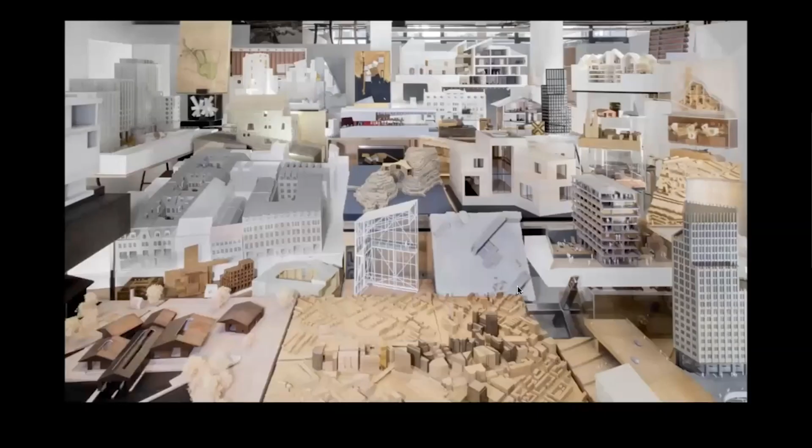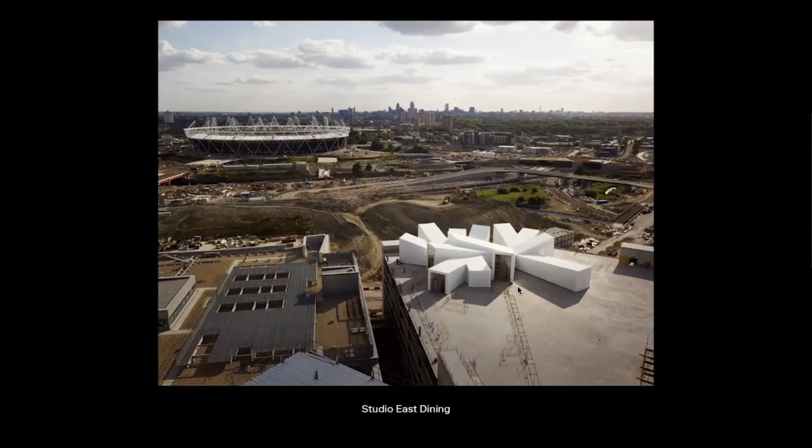Here's us. This is Carmody Groarke. Our studio's in Farringdon in London. Here's our studio full of all of our projects. Some of the early projects make a virtue out of the necessity of scarcity. Sometimes that's an economic scarcity, and sometimes it's quite literally the idea of a short-lived and quick-build project.

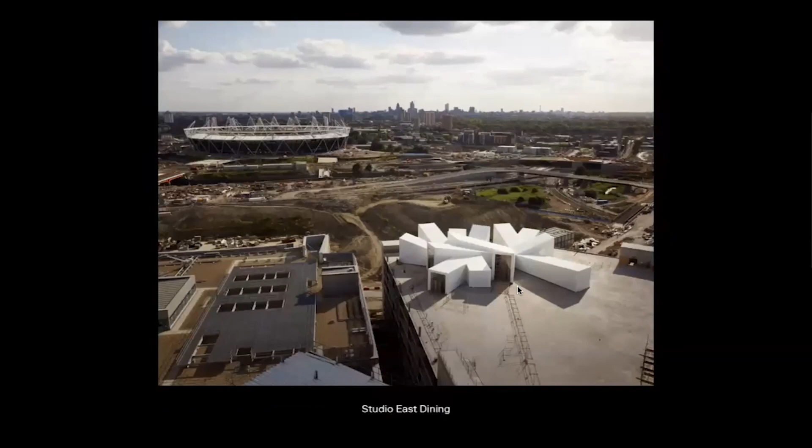As you can see here, this is Studio East Dining, which we did in 2010. This was a project that celebrated the emergence of the Olympic Games masterplan site in Stratford, and the project was essentially a hospitality pavilion made entirely out of materials borrowed from the construction site surrounding it. And what you see here is this cathedral-like quality space made of scaffolding, scaffolding boards and builder's lamps.

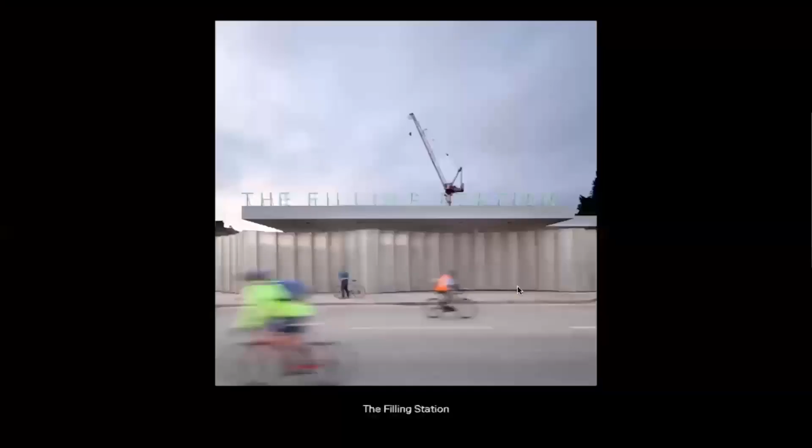And I think that these projects gain their sense of character often from the materials available and often through thrifty, economical means, and are very direct in the way that they communicate how they were made.

This is the Filling Station. So from three weeks, this project was intended to last for 3 years. And this took an existing petrol station right next to the emerging construction site of King's Cross behind. And you can just see Central St Martin's just emerging in the background.

And this was essentially a space that created a cultural venue with a restaurant and bar that overlooked the now opened up terrace of the Regent's Canal, and literally used the infrastructure of the petrol station to gain its sense of character. It was enveloped entirely in this glass reinforced plastic screen, which essentially protected people within. And then we literally used the shop of the petrol station as a restaurant, which became a fine dining restaurant.

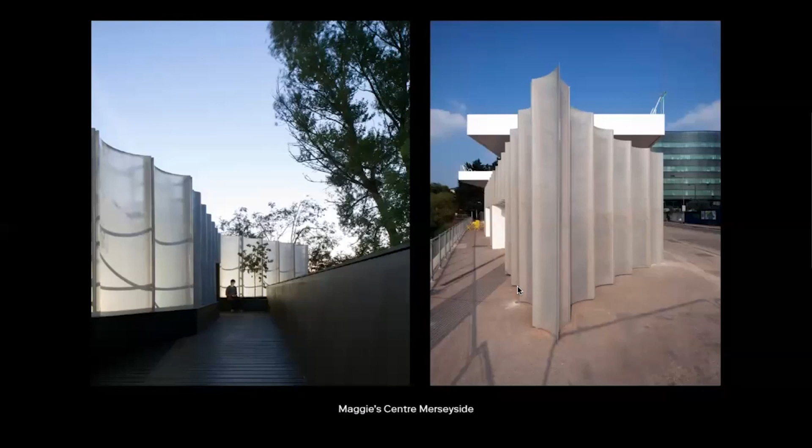And I think what really characterises our work is that we're also not afraid to reference ourselves. So we use the same component of that project in the Maggie's Centre for economical purposes, but it felt like a very appropriate way to make a new piece of architecture developed from something else.

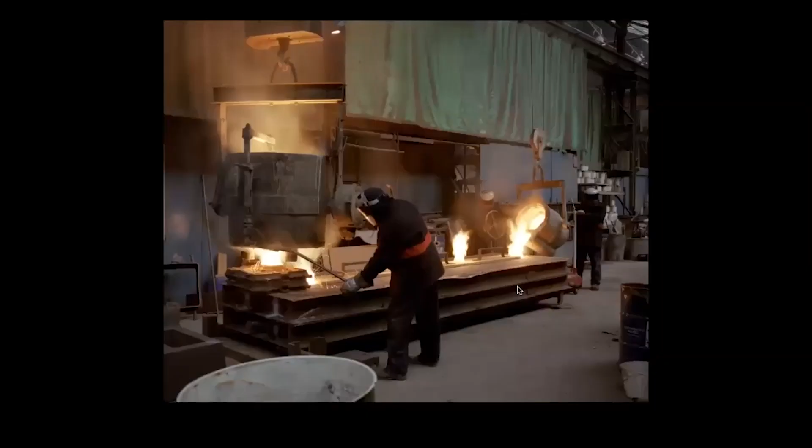And shifting the time frame entirely to 300 years, this just shows a completely different challenge. This was a memorial to the 7th of July bombings, which is in Hyde Park just by us. This project had the idea of making a memorial out of the singular and collective loss of 4 different events and 52 innocent people that died. Each stelae is essentially cast of molten stainless steel in just 20 seconds and has an incredibly tactile surface quality to it that stands in the park.

And I think that all of these projects come from an entirely open approach to collaborating. Our studio has, I think, as this school also does, the ethos of taking in a diverse range of influences of artistic practice, of makers, and a completely diverse creative discipline. And what I hope from the projects that I'll show you is that these projects kind of embody an approach that attempts to make the most out of the least.

And I'm going to focus on 3 projects that I think really capture the idea of retain, reuse and reinvent. I'm just going to show you very quickly. Some of you, I think, have already been here, which is really useful. So this is the Hill House box that is essentially a protective shroud around this magnificent house by Charles Rennie Mackintosh. Now this house is disintegrating because it's in Scotland and subject to lots of strong weather.

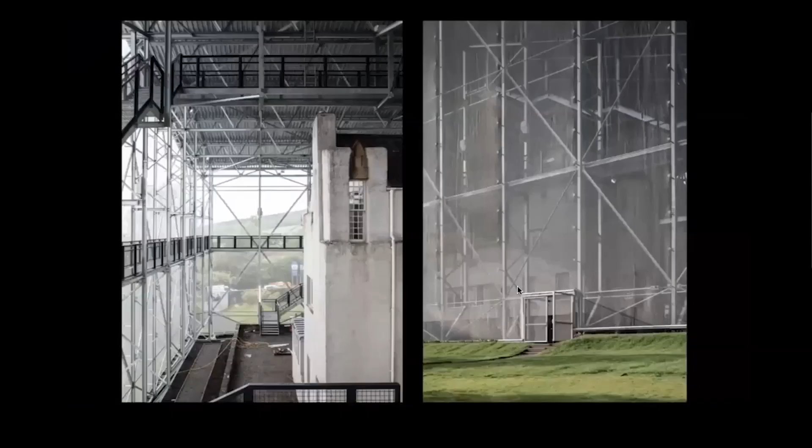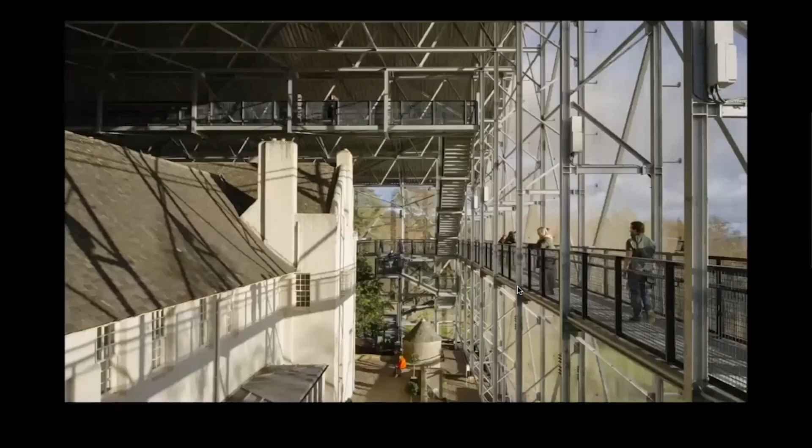This project essentially creates a temporary shelter, which was needed, but in doing so creates these wonderful moments that mean that you can literally physically move around this space as a visitor experience and see very up close and direct the conservation attempt to restore and kind of bring back to life this wonderful building. And in doing so, this change of aspect gives you lots of different aspects of the site, which is on the top of a hill overlooking Helensburgh.

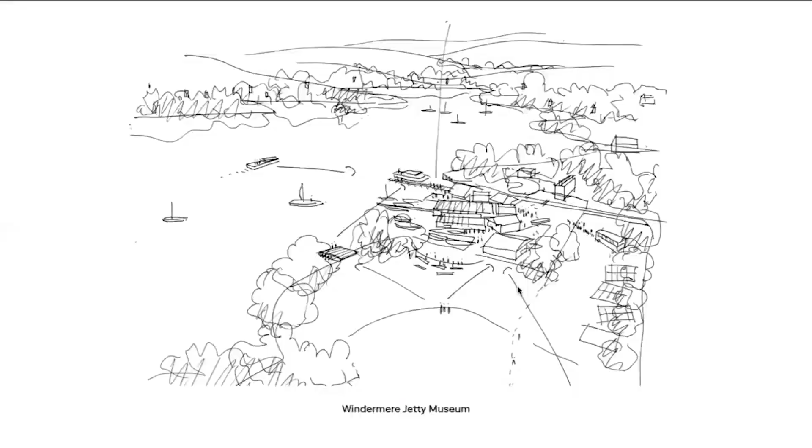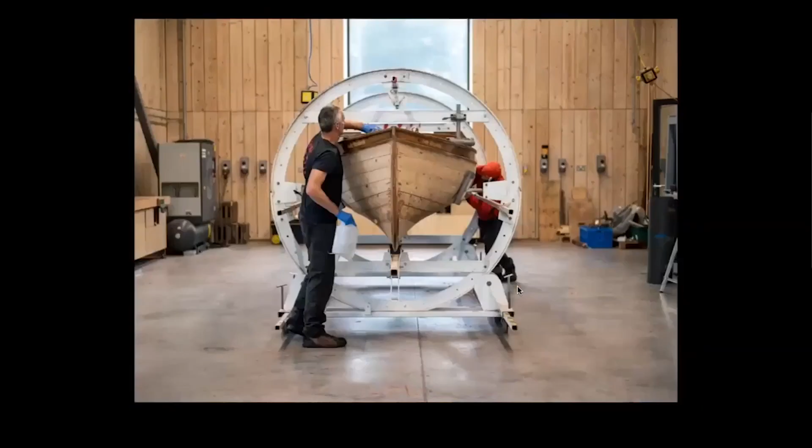This project is probably our most well-known, Windermere Jetty Museum in the Lake District. So this is a series of archetypal sheds clustered around an existing museum, and these archetypal sheds have these incredible carved out volumes that start to suggest a way that the museum takes in the inside and the outside as a museum experience. This museum has a very direct relationship to water, it being a museum mainly for boats, and it has a very direct relationship to the act of conservation, which is actually celebrated in one of the main buildings. So you can very much as a visitor see this happening, like the Hill House, in action.

So I'm going to talk about 3 projects. This one is the first, 2 pavilions. Now, this is a domestic project, a master plan for a house in Sussex in the UK. It was quite an unusual client brief because the client had already built a rather lovely house only a few years before and asked us to extend it. That was quite a peculiar request, given that it's such a precise piece of architecture. But through talking to them, they said they think they've got 2 needs. One is a small domestic extension for guests to stay, and the other is a studio to think, make, and relax.

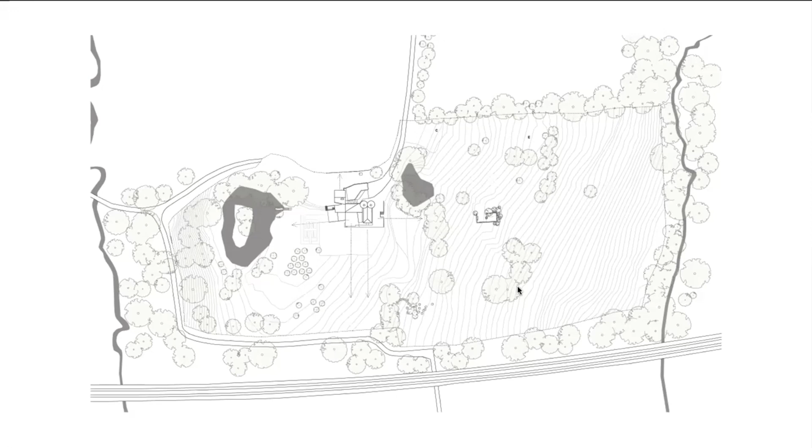This is the site, so it's basically a piece of ex-farmland. The existing house is right in the middle, and there's a kind of high point and it drops all the way down here. And it's a wonderful kind of established landscape of grassland and semi-woodland. And the dark spot here is essentially a lake with an island. And here is a ruin as well. So that's the former farmhouse of the site.

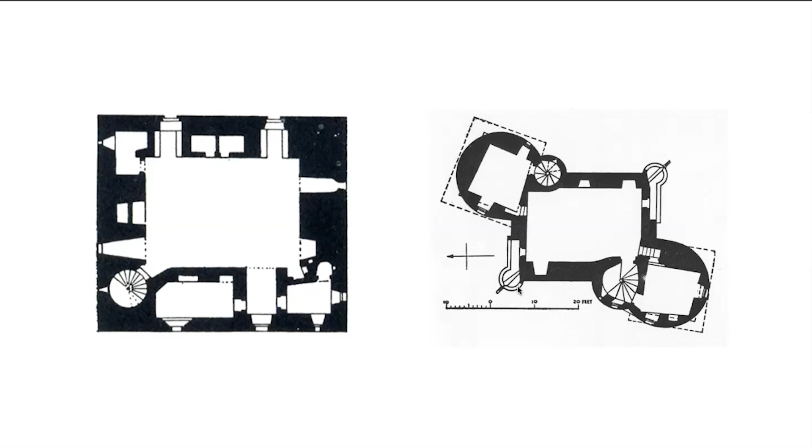So the guest room. We didn't quite fancy the idea of trying to extend this very precise and contemporary piece of architecture. We were seduced by the setting of the lake, this kind of picturesque moment, and it being quite distinctively different from the existing house. And we started to explore the idea of quite primitive forms. As you can see here, these are castles that start to suggest this almost bunker-like quality with carved out spaces implying domestic use, or even quite simply a rock that is carved out in the most simple and primitive way.

The distinction of a hermitage is something that is quite deliberately far away from civilization. So you are taking yourself away. And we thought that was a really nice idea for the challenge of trying to extend a contemporary piece of architecture. And this wonderful quote: at its core lies the notion of contemplative solitude and pleasurable melancholy. That sums up the client quite well, actually.

We used lots of different techniques to develop this project. This just shows almost the sequence of developing ideas. We have this idea of a single plain room, quite a humble space, but then started to get character from, as you can see on the right-hand side, the idea of carving out little spaces that had all of what you need in a small domestic room.

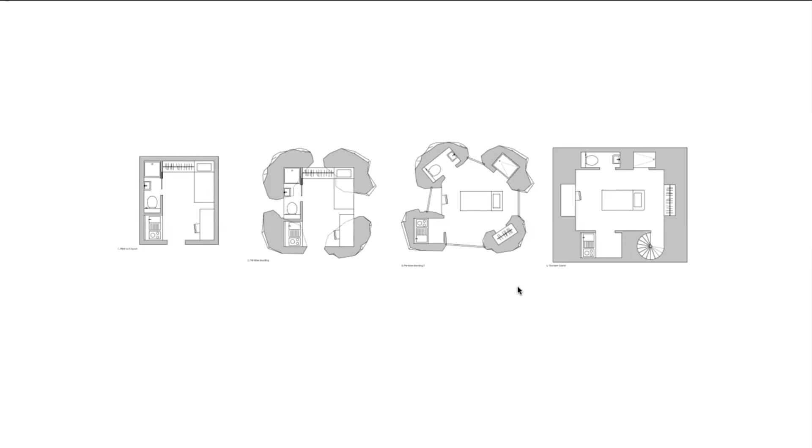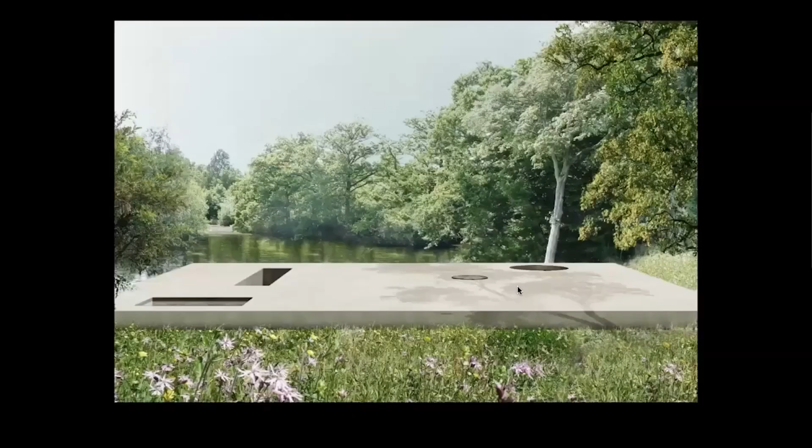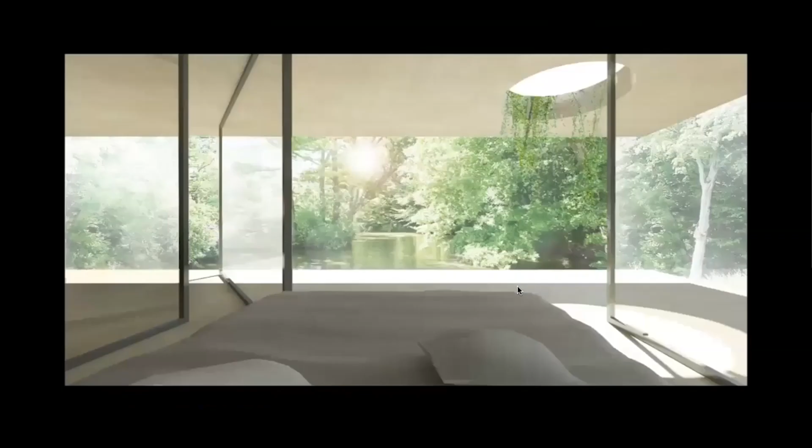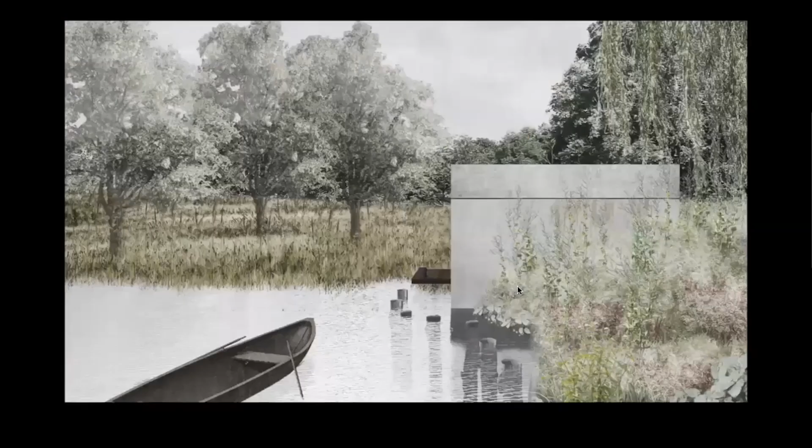The scheme developed over a number of months, and we ended up being very interested in the idea of this almost monolithic form that implied it was positioned in the landscape quite deliberately with that very direct relationship to water, but also it starts to open up this idea that the interior of this space might be altogether different.

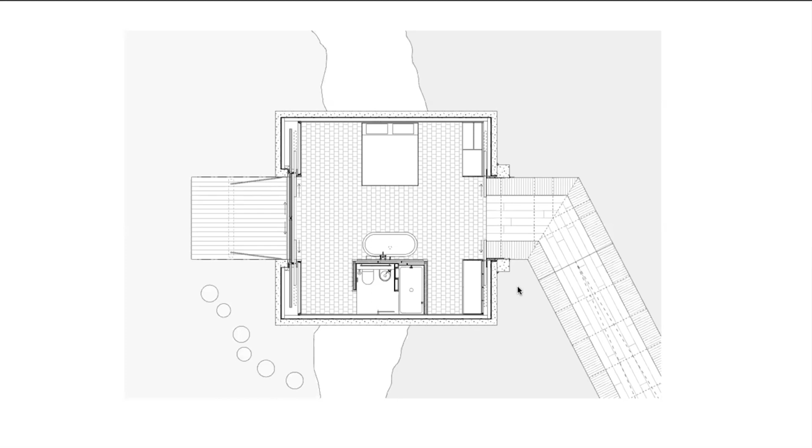And we started to sketch out plans, and this was the eventual plan that we landed on. So this is a 6 by 6 square meter room, and it just features the basic ingredients of a guest room altogether. And you can see, obviously, the largest spatial idea is that it has this axis as you come in to this rather large jetty that is almost like a drawbridge. So it has a really generous sized aperture, a single bed and a single bathtub.

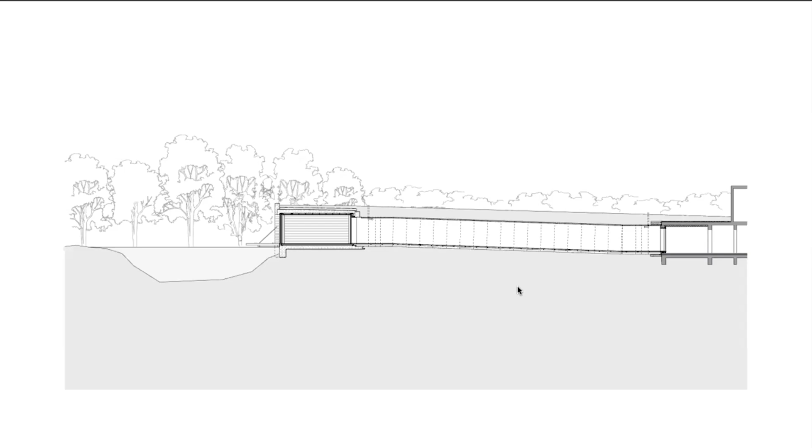Clearly, the question of how to access this building was brought up, and we pitched the idea of a tunnel. Quite amazingly, the client was mad enough to take that idea. So we took the existing house, which started here, and said, well, look, there's a big landscape project for this scheme done by Joe Gibbons, and that was all to be re-landscaped on top. So we said, why don't we use that opportunity to carve out and implant a tunnel that connected this singular room by the lake back to the house. And we said it would be really fun, actually, if your guests were really surprised by this.

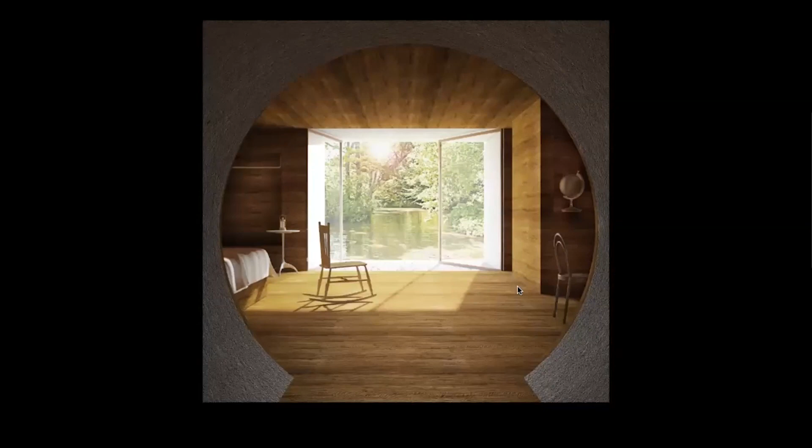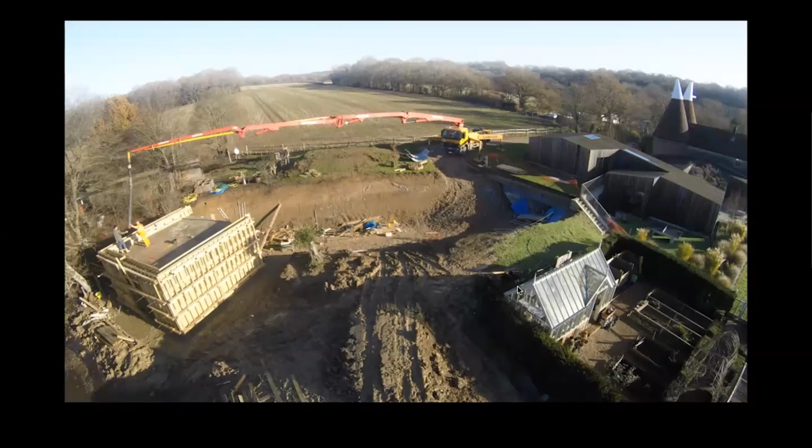And this gives you a real sense of the site. You can see the farmland in the background and the original house here. And just here is where we were making our opening and implanting our tunnel. I should say that this took more than 3 times to pour. The pressure on the walls themselves blew all of the formwork. So we had to rebuild this almost 3 different times with 3 different concrete pours.

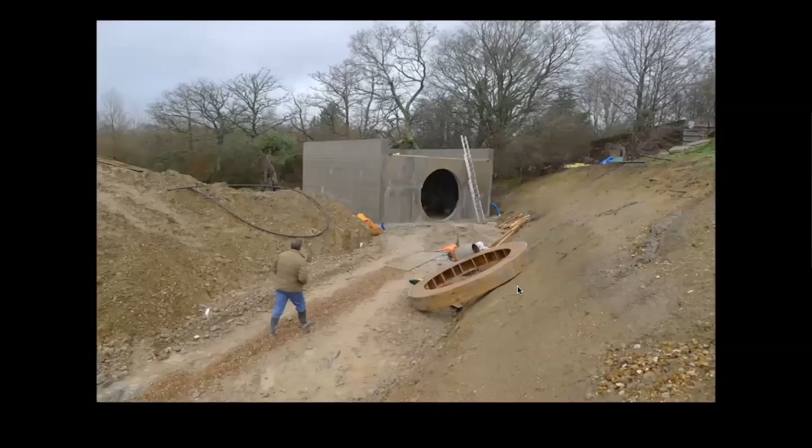And you can just see, as this was a bit of a building site, just the form starting to emerge, almost like this kind of tomb embedded in the landscape. And what seems like a very kind of brutal image, but really gives you a clue as to what we needed to do to achieve this. You can see that the aperture of the tunnel is kind of set in here, and this really exaggerated parapet, which was to receive essentially the landscape back on top.

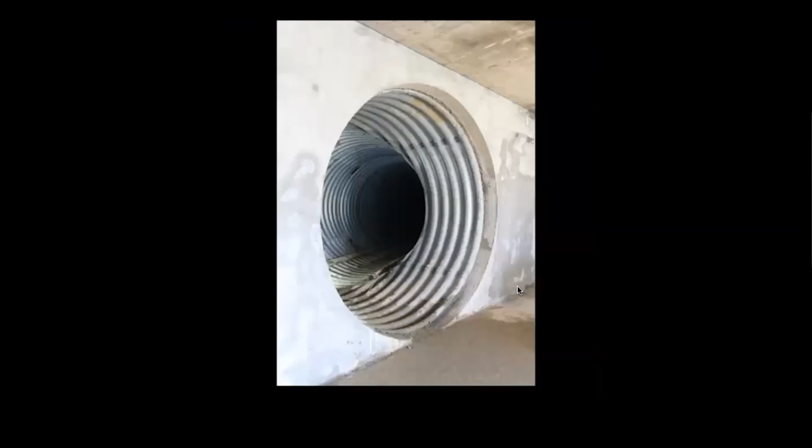And this image, I think, is really telling. So the material idea of this kind of concrete shell was given a timber board mark, and you can see the aperture in the background. And that we wanted to explore the idea of taking on the inside as well. The tunnel ended up being a series of industrial galvanized sheets literally bolted together, and they had a completely surprising but rather lovely aspect to them. So remember that Third Man reference, and you can really see how that started to come alive.

And you can just see the kind of way that some of those early ideas of connecting yourself to nature and those moments of direct connection to water start to come through certain projects. The studio, so this is the second project on this site. So lucky to have one of those projects, and this was two over the same site. So this is our kind of Arcadian ruin sitting in the farm landscape.

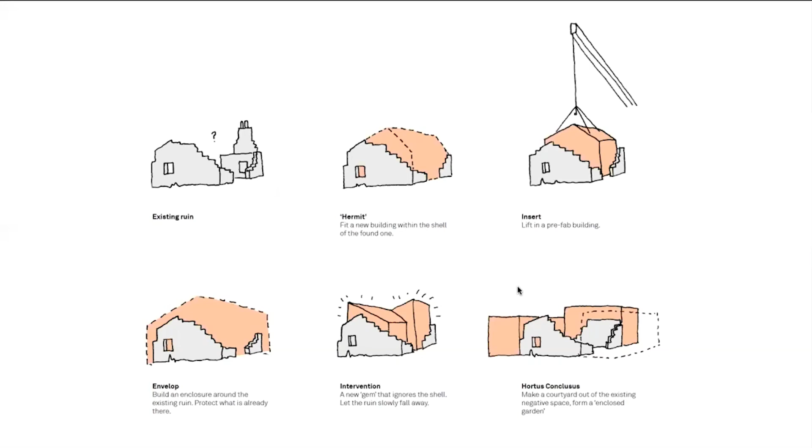We had a series of ideas about how we might explore the reappropriation of this building. We said we could just let it ruin and it could just be a folly in the landscape. But we rather like the idea, coming back to that idea of the hermit, that we could make some kind of primitive shelter around this, making sense of this ruin. And in the same book, there's a series of images of literally hermits, hermitage. This kind of starts to imply a very elemental roof that makes sense of masonry support.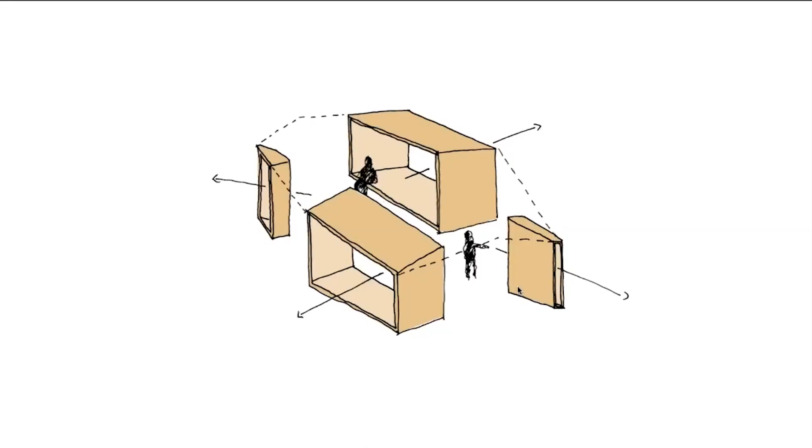Now this image shows the way that the idea of this building might come from actually making a series of apertures that make sense of different parts of this site, and that perhaps those apertures also might be a structural way to tie this building together. So each of these, whether they're a deep entrance hood or a large north-facing window, or a very deliberately small window facing south to limit sunlight, each of them has a direct relationship with other parts of the site. And what you can also see here is how this simple idea comes together in just three materials.

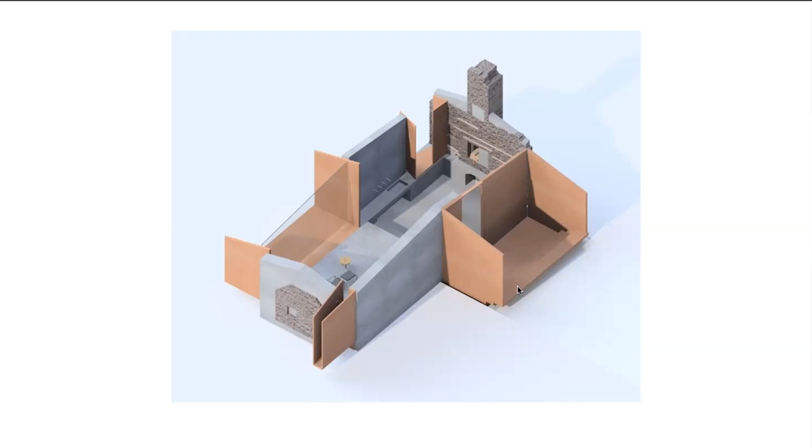So the existing masonry is left. The concrete essentially fuses the whole building together, and then these Corten hoods start to open up the apertures and make it useful. We showed again images, just simple collages about how the material texture might come together and imply these moments.

We developed this project with an amazing builder, an amazing structural engineer, and a blacksmith that happened to live in the village, which is almost storybook stuff, but it's true. Ben, the blacksmith, he helped us make this. And we started to talk about how we could form this roof.

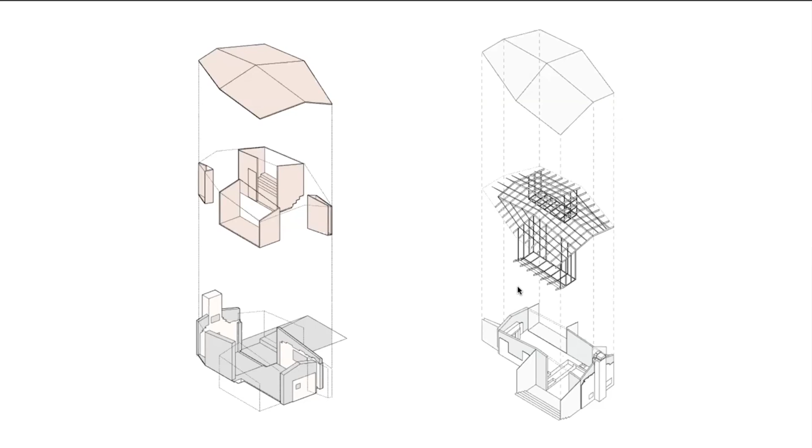So we said, well, look, we've got the idea of these four apertures, and we love the idea of this becoming almost like a monocoque, and that perhaps the inside of it might be more figurative, but the outside very abstract, and that makes sense of the inside and makes two simple spaces over the difference between the two elements of the old house. Let's keep all of that and use that as the identity of this building.

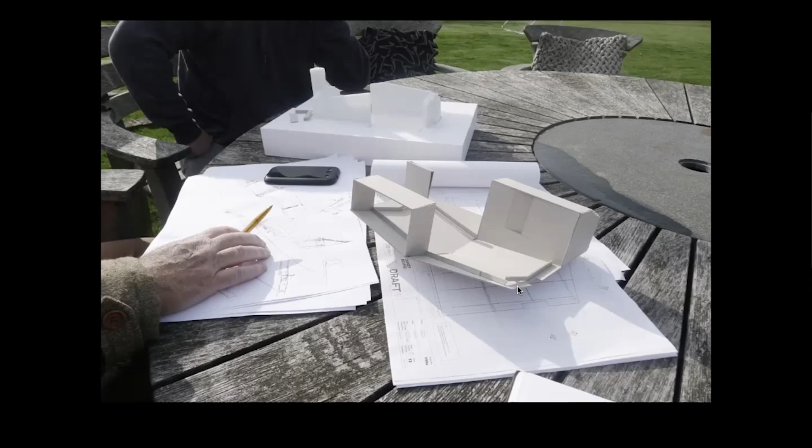We also, with Ben, explored the idea of how we could actually make this in reality. And he said, well, it's basically like building the hull of a ship. So that's basically what we did. We figured out a series of ribs, which essentially become your structural organization. And then over that, literally 5mm thick Corten steel sheet was welded in situ onto that metal frame.

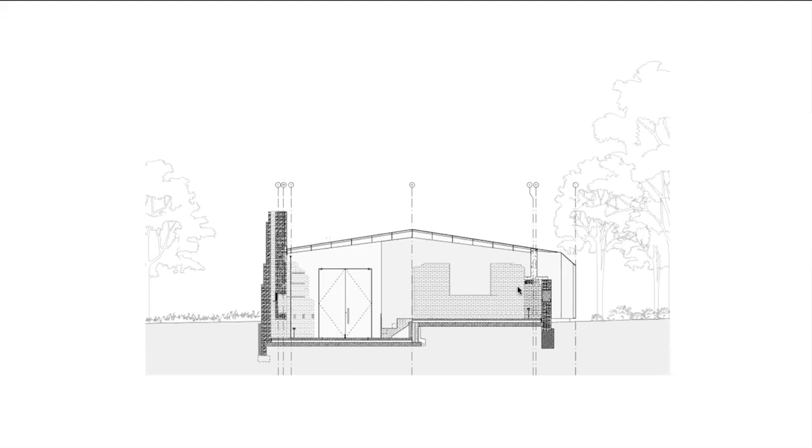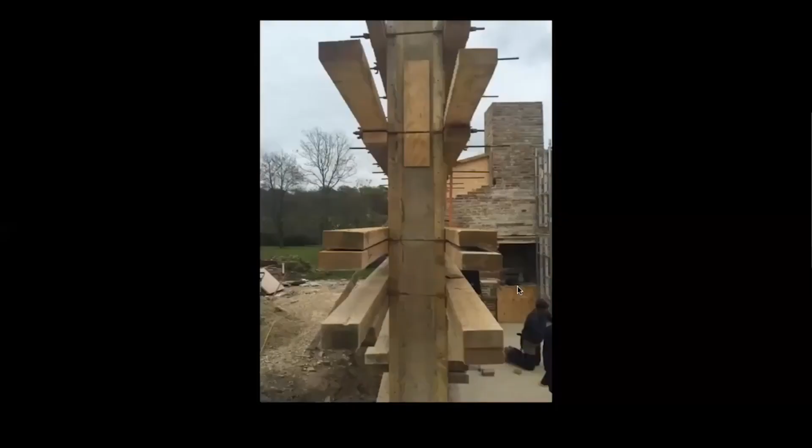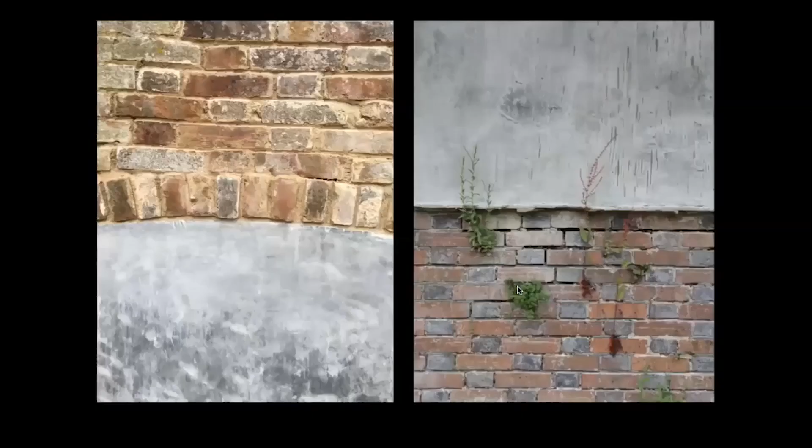And the formwork, making the concrete walls, as you can see here, the formwork is literally cast over the top of the masonry. So what that does is it fuses the masonry together, it safeguards that existing structure, and it starts to make sense of the starting point of this. And you get these wonderful moments of juxtaposition of existing masonry, this new polished concrete and the vegetation that we were very keen to just let live and take over.

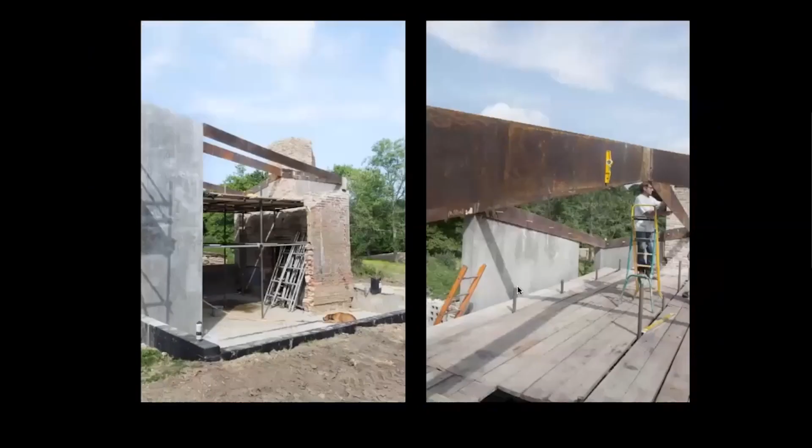You can see here the emergence of the cruciform, almost ring beam. So this is how the shape of the roof was made. We negotiated where this was, depending on how the concrete was struck. So we took that out and said, okay, these 2 points in space, let's say that these are the angles, and we'll work out the rest from there.

And then Ben, that's actually Ben's mate, but Ben basically got up on the roof and started welding. He had to stop every time it rained because he uses an arc welder, which is full of electricity. So you don't want to be standing on a conductive surface in the rain, shooting electricity through it.

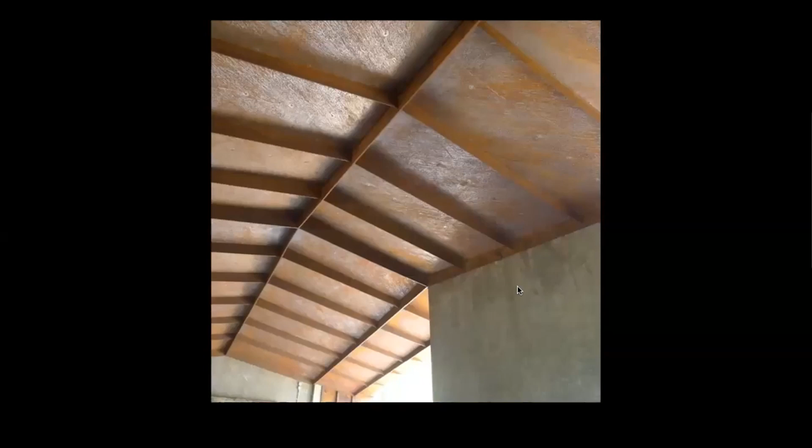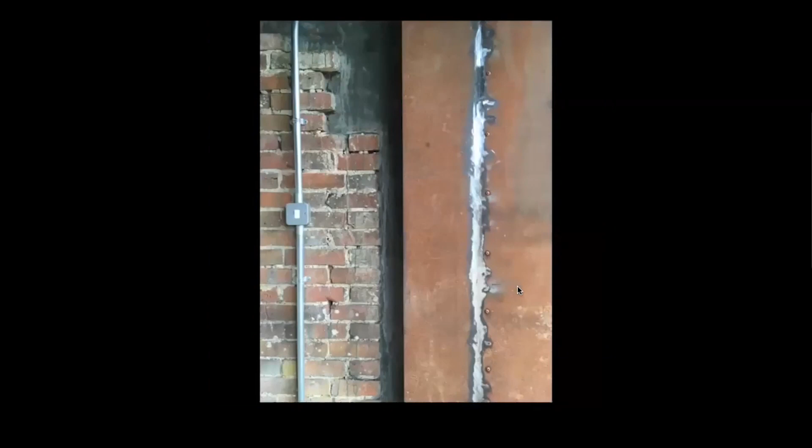But you start to see the emergence of the interior. So that idea that we talked about earlier of this having an almost ship-like quality starting to emerge inside. And the idea of the maker's marks being left, we were completely happy with that. And actually the imperfection of this building is really what we were driven towards, that humble and very primitive form of making, it being very communicative of how each material came together.

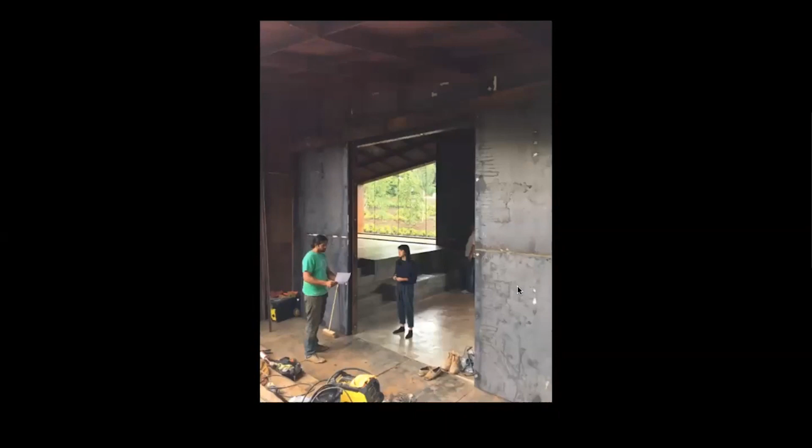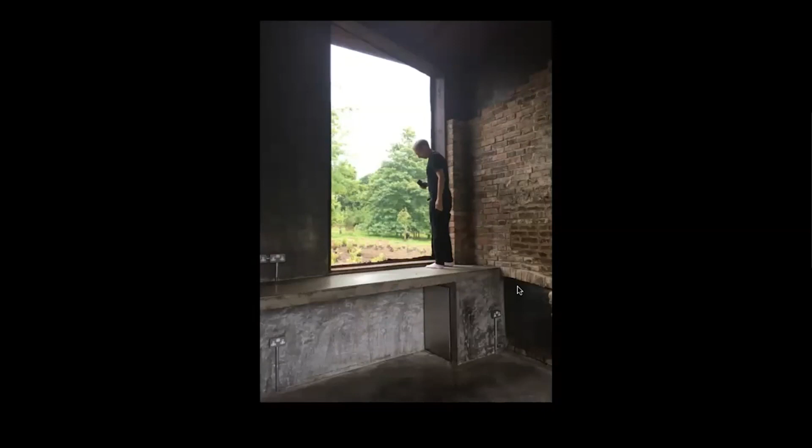And again, this is Win, the project architect, that's Ben. And this just shows you the scale of the space, which I think is quite remarkable. And this is the entrance hood that looks through to the maker's space and then up to the large north-facing writer's window. That's me on the worktop, which links the 2 spaces together. So this is for pottering around, for making clay heads or whatever the client wanted to do.

And you just see how these start to come together as a series of materials and spaces. And I'll just go back. That, if you remember, that's the fireplace that I showed right at the start, now reinstated, and was used again for a fire, actually. And again, the kind of hall-like quality, so you can really see how that existing gable was completely left in situ and fused together now with these 3 materials.

Sequence of spaces, very rough and quite honest materials just left to do their thing and age. This is Corten, so eventually this will go bright red as it oxidizes. And here you can just see the very kind of direct nature. This was completely intentional, but we really like the idea that actually the kind of boundary edge of this building would just get overtaken with nature once again.

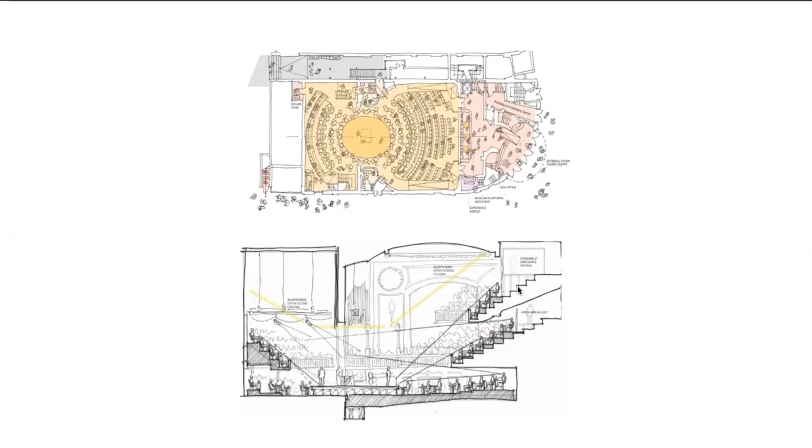And I think part of this idea was actually the challenge to take the existing rake of the theatre, you can see just in the outline here, and just completely change that to make a completely flat series of spaces that actually talk about how almost a club-like space might be made.

And instead of actually coming through the front door, which might seem like the linear progression of a theatrical experience, we persuaded the client actually to use the stage door as the entrance to this theatre. So being not fussy about the fact that this is a very back of house space, and understanding that that's part of the ethos of this show, and using the virtue of this very imperfect and quite cluttered space and trying to make it part of that theatrical experience.

So performers are in every single part of this space, including above the main bar of the space, which features the perch, where essentially there is an indivisible nature of where the show stops and starts. So it starts pretty much as you walk in, and by the time you walk out, you're not quite sure of who or what is a performer and what is a performance space or what isn't.

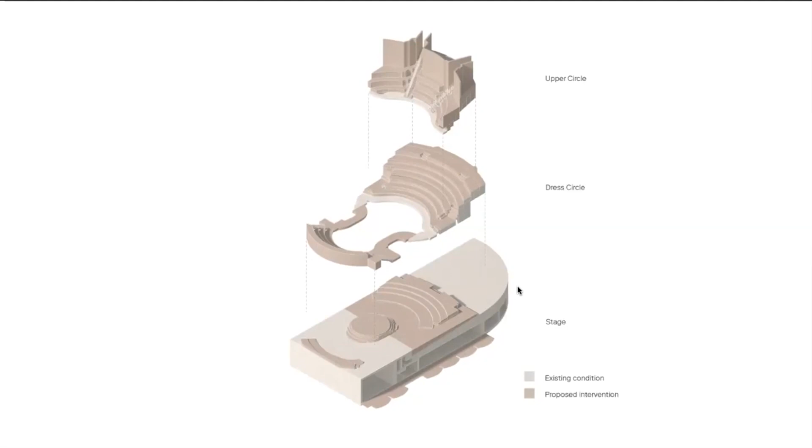And the auditorium itself was an incredible technical challenge. I think this looks quite simple, but this was a very, very difficult technical challenge of trying to work out how to reappropriate this existing theatre. And this is essentially how we did it, in a very lo-fi way. So we stripped back the existing theatre. We had to keep pretty much everything in that space. But what we then did is sleeve over the top this very lo-fi, sustainable, all made of wood, all returnable to its original state, and able to be built in a very quick way.

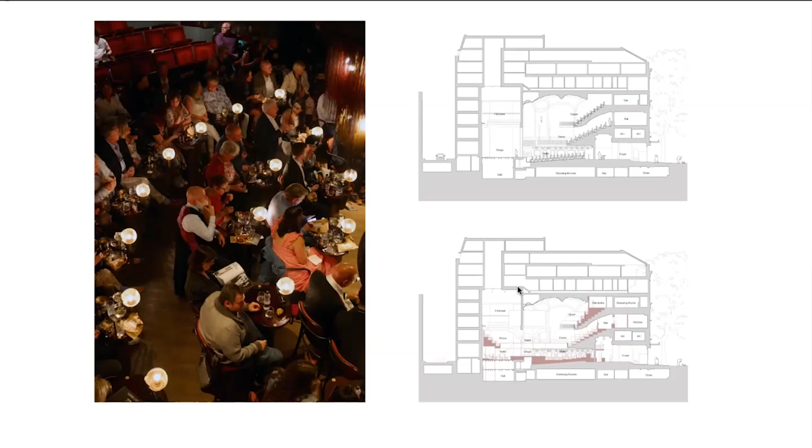And this is the transformation of the space. And what you can see, I think, is that immediate change of scale and focus to this central space and the club seating around. And then again, the transformation of all of the new, subtly sleeved over the top. And I think it's a testament to the team that lots of people walk in here and think that it was always like this. And actually, the attention to detail and trying to subvert all of those things, I think, was part of the interesting challenge of that project.

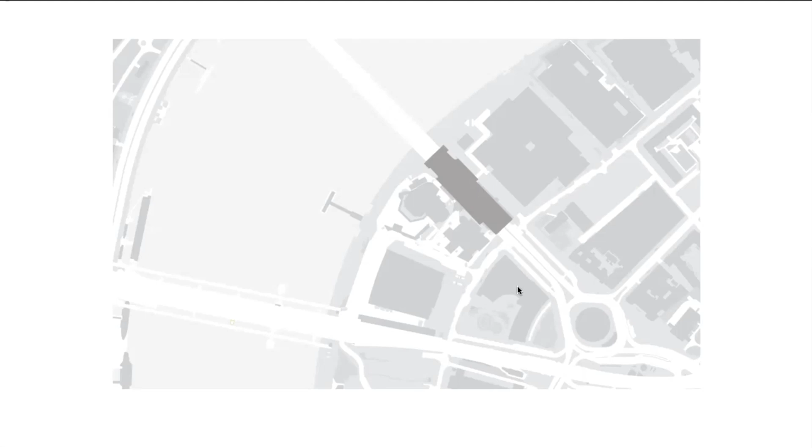And finally, the BFI on the South Bank. Quite interestingly, the Playhouse is just here on this map, and we really should get a map of both of them put together. But I must be one of the only people to have worked on two projects that are literally diametrically opposite each other on the River Thames. So this is the South Bank in London, obviously, and this is Waterloo Bridge. And the promenade runs underneath this bridge. And this was our site. So this is the BFI's, essentially their front door.

And I think you can probably see here, this is before we were involved, but what we found was a very incoherent and slightly illegible entrance. And this is the national centre for film in the UK. So I think it was fair to say that it didn't quite communicate what it does. And the interior was no less impressive. So essentially you had this single floor, felt very confined, and essentially had a hospitality function, and it just whisked you straight in. And there was nothing really that celebrated film here, and nothing that made sense of its position under this incredibly sculptural and impressive bridge.

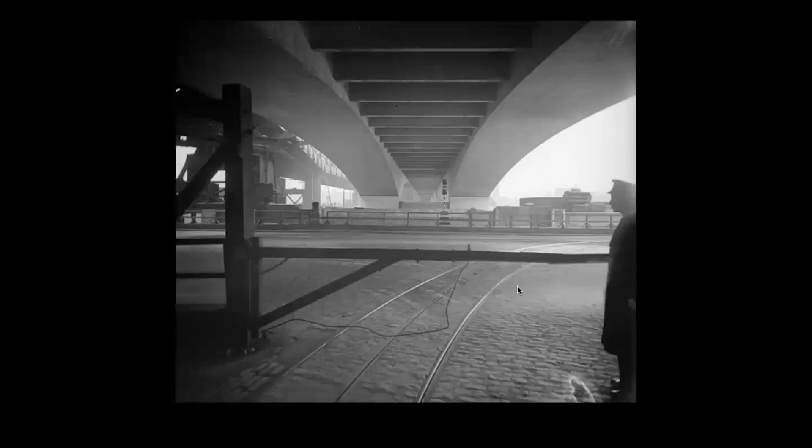I'm sorry, this is a lo-fi image, but the original BFI was this quite humble, almost hermit crab-like space that was tightly fitted between the two descending arches of the bridge. And I think it had a much more interesting relationship to the sculptural quality of the bridge. The bridge itself was on the previous one. So the bridge is this wonderful piece of sculpture. This is actually a listed bridge, so it's grade 2 listed. So we were not allowed in this project to touch this bridge, but I think we had to engage with it in some architectural or material way.

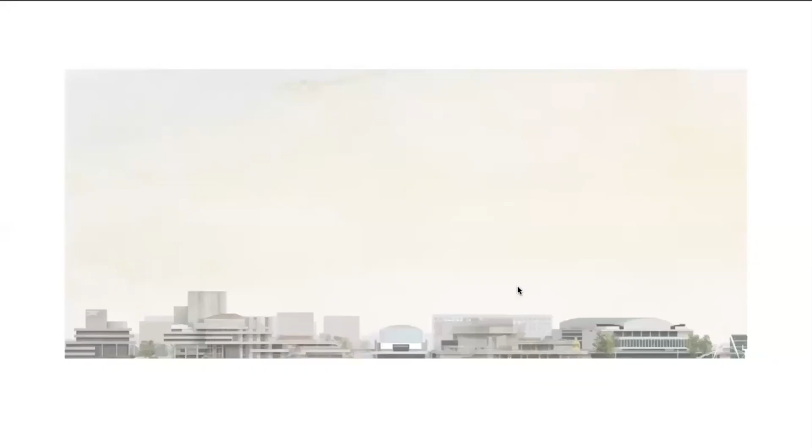What was interesting about the BFI is that first quite cute little building was then extended twice. So this has got lots of layers of history as the South Bank essentially was expanded. So all of the public thoroughfares you see today, this is in the 1980s, but rather than rebuild it, they just built new layers and new layers. So it got these crusts and developed quite a funny overlap of structure. I think the thing that we started to do was look at the South Bank in general, because the South Bank is essentially a set piece that I think is experienced in a very three-dimensional way.

This is a 2D image, but I think it starts to imply the nature that I think started with some of these buildings, the Royal Festival Hall, the Queen Elizabeth Hall, the Hayward Gallery, the National Theatre, and the IBM building, of this kind of series of horizontal levels that give you lots of different three-dimensional perspectives on how you experience the South Bank.

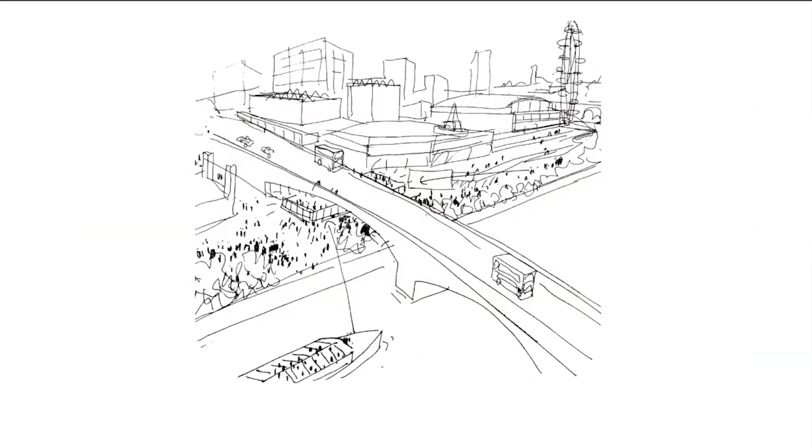And when we did this competition, we said, well, look, we're interested in lots of different things, but there's two things that are kind of unavoidable. This is on the South Bank, and it has a very direct relationship with the bridge. So we were interested in trying to make something of that.

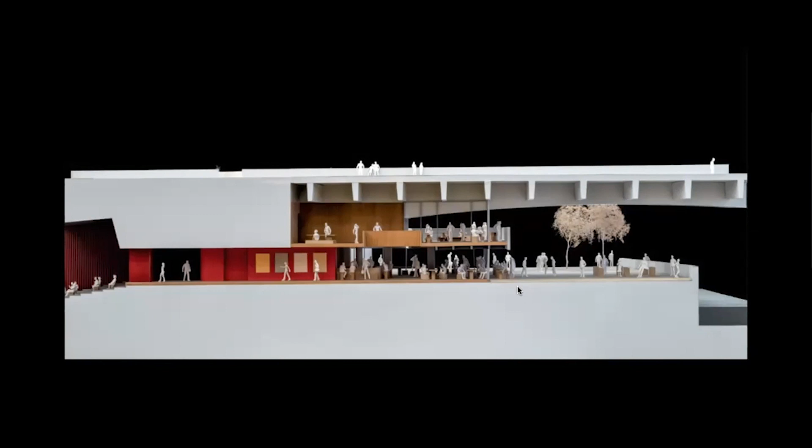We showed the client these sketch models that start to explore, or re-explore, the idea of this top section having some kind of relationship with the bridge, and perhaps that you get a much more direct relationship to the existing cinema, which is embedded underneath almost in the belly of the bridge, that has a more direct relationship to the inside and out, and then also a more direct relationship with the bridge itself.

And I think what was really brave, and I'm so glad that we did, is persuade almost everyone that challenged us that we should just use the bridge as our ceiling. This is a monumentally thick piece of concrete. It's already there. It's probably never going to go away.

And it's so thick, in fact, that you don't really need to service this space very much because it has so much thermal mass that it creates an almost equilibrium in this space, rather like being in a cave. And then you get to enjoy the material quality of this sculptural bridge in a completely different way, from a completely different perspective.

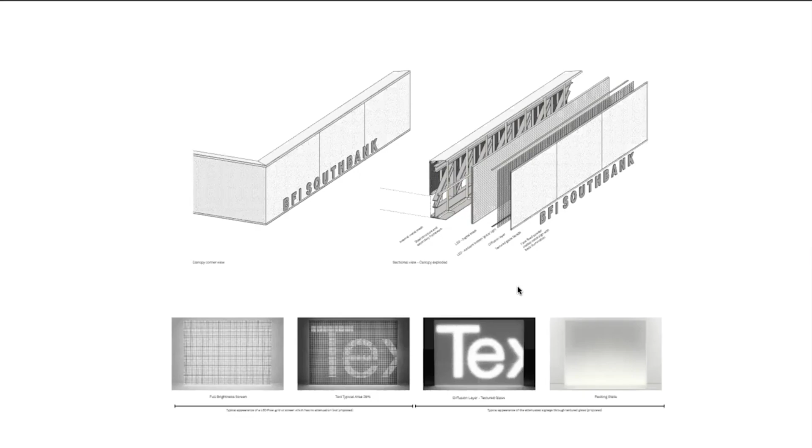And we did lots of tests. So we got hold of lots of LED screens, and these are very lo-fi screens. You would have seen these probably in the early 2000s. And we said, well, that could be a really cool way of actually communicating this program. These are images that we did. We did lots and lots of different tests using, you can see here, different intervals of space. And what we were doing is testing the optical quality of how you use different materials to diffuse the impression of light coming through the surface.

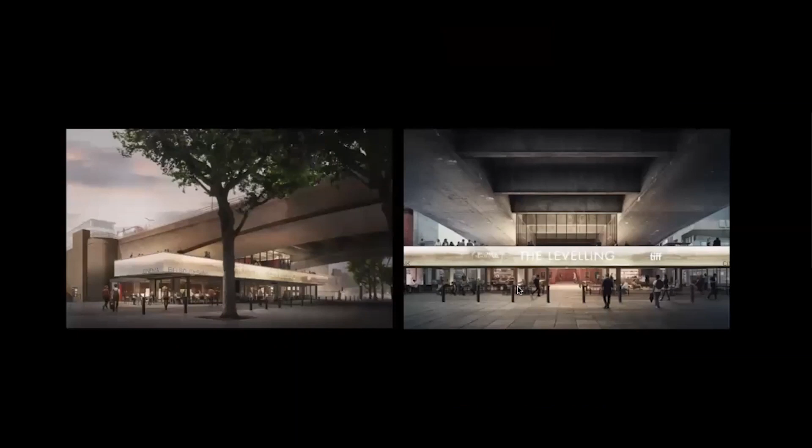And this was an image that we did at the very start of this project that said, well, that might have quite an ethereal quality. This is not Las Vegas, this is actually something a bit more subtle that sits into this set piece of the South Bank, that when you get close to it, might be a bit more clear, or maybe a bit further away from across the river, you might be able to see these in different focuses.

As it happened, we couldn't afford to do that in the first phase, I should say. It's been designed to receive all of this, and when they get the money, if anyone's got a few quid, they would gladly accept it. Kind of coming full circle, we decided to have an intermediate version of this space. So instead of the glass that we had proposed with the series of interlayers, we're using glass reinforced plastic that we used on the filling station originally, and then Maggie Centre and subsequently other museum projects. We also used the same people that made it, so we knew exactly the optical effect that we might get.

And actually, we weren't quite sure about how this would behave, but we were pleasantly surprised in the way that as the sun moved around this space, it started to literally give you those silhouettes. So if someone's up there, you can see this very almost cartoon-like series of shadows. And there you see the South Bank in relation to its grander neighbours.

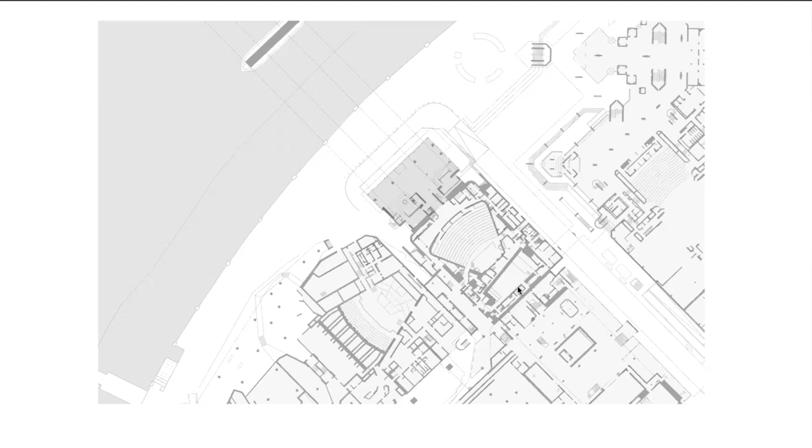And actually, one of the strong ideas of this project was that the ground plane was bled into the South Bank. So the floor, these are new quarry tiles, which if you've ever been around the back of the South Bank and around the National Theatre, are essentially all the dark quarry tiles.

And what we did is essentially, it's quite hard to see this because you need to be up in the sky looking down with no lid. But what we essentially did is set out a series of patterns that graded from the red as they got to the cinema, back to the blue of the South Bank, and they literally go inside to outside.

And you can see here also we made a series of bespoke tables and chairs, benches that we made with furniture makers distinctly for this project, which means that you can configure this space in lots of different ways, whether that's an intimate spot or collectively. And then the building is returned once again to its setting under the bridge.

I'm just going to end on this. So I think that the title of this was Retain, Reuse and Reinvent. And I think that you probably hopefully started to string together some of the themes of how certain smaller buildings start to have relationships to those longer lasting ones.

That the idea of reinvention and literal reuse of what's already there is not just a necessity in economic and sustainability terms, but it also leads to a richer reading of architecture, and I think that makes a richer and more enjoyable series of spaces to enjoy our places and cities.

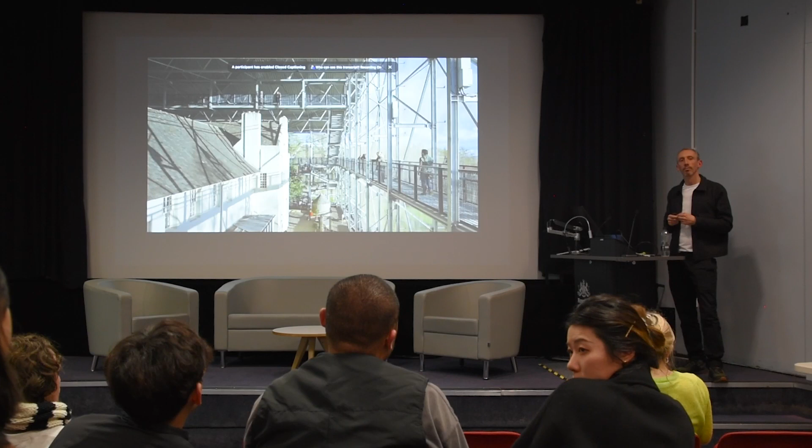The confidence came from the fact that the BFI had existed under the bridge for almost 60 years. I should have said actually that the upper space actually was a private office. There were 2 desks. That view that I showed down the bridge, there was just 2 desks. I can't remember what they did, but they must have had the greatest secret office in London. So they were very aware of what the bridge did. The bridge also moves as well, by the way.

One of the technical challenges of that project, I'll very quickly get to it, was essentially conceiving of that whole project without touching the bridge at all. Structurally, materially, none of that is enclosed as a physical space. Sorry, I'll get to it. Oh, it's the last one, isn't it? Should have gone backwards.

What's the picture? Okay, so the closest we got to touching the bridge was essentially this top section here. So all of this is just resting using a kind of rubber brush, like you would use to stop air seeping through a window, so it's like a draft excluder. So the whole of that space is essentially open to the environment.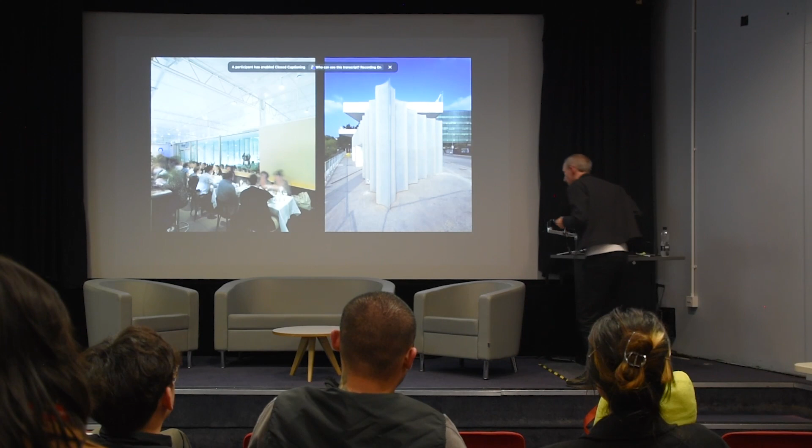So the shape of these curved inclines was actually to make them stand up. The back of them has this kind of flange that sticks out. And essentially, if this was a flat section, then it would just flop over. But because of the incline of it, that gives it a rigidity, which means it doesn't flex altogether.

So if you do a series of flat panels, essentially what they want to do is fall over all at the same time. And what the curve does is it actually disturbs the air moving around it, and it also gives it rigidity. So it almost makes it into a kind of I-beam, if that makes sense. So we didn't come up with that idea. That was this lovely guy that usually makes canoes.

We approached him, we were trying to find someone to make a panel for us, and we were quite interested in the optical quality of this, because if anyone saw this in real life, it basically was lit from behind. So that's one of the ideas that we explored many times. This could literally project artificial light through it, but by day it looks quite solid.

And he said, well, I can make this for you, but my day job is making canoes and rafts in the same way. So what you basically do is make a barrel, and then you layer the glass reinforcement, and you essentially overlay. We use the bio resin here to fuse it together, which is why it's a bit green. And that's what gives it its shape.

Yeah, I think it's always a judgment, isn't it? Because some of our work, I'm just going to flick to this project. This is probably the best example of how we made the most of someone's specialism. So Ben, the blacksmith, sorry.

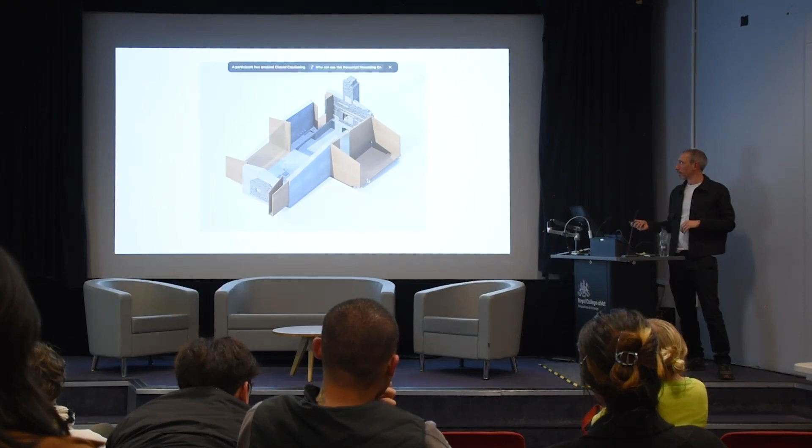Let's get to this. So when we were working out this project here, we had no idea whether or not that point existed. That's just a kind of coordinate in space. We had no idea that that point existed. We had to, as architects, suggest the starting point of an architectural idea.

In this case, the four apertures in the roof, and the idea of working with this craftsman, in this case a blacksmith, was about the practical nature of how to, in some cases, physically get sheets up to a certain shape, but also how the sheets might behave in different conditions. And as I said before, we used barely any drawings on this project.

So the really difficult thing about this project is that you couldn't predict necessarily how any of the sequences of restoring the brickwork, which was by no means fixed, it was all crumbling, to then fusing the concrete around it, to then almost drawing using steel, the Corten in real life, and saying, well, here's our model and here's what we would like to happen. So we said, okay, in a way it's kind of algebra: if you can make point A meet point A and point B meet point B, then we're happy.

And we were quite encouraged. I think this obviously comes from working with someone quite closely and gaining their confidence and understanding what they can do and how they read drawings or models. And in Ben's case, he saw a section and said, I don't understand what that is. He literally works with his hands all day long, forging gate posts and really frilly fences. He's a great blacksmith, but he's never done anything like this.

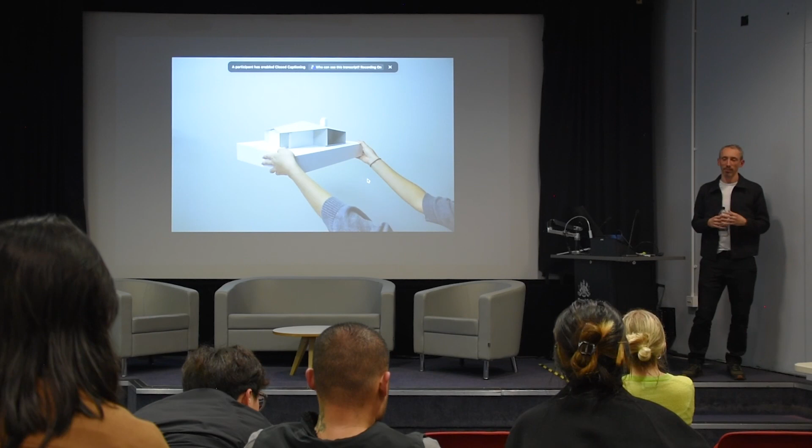It can be quite difficult, and there have been projects where we've stuck our neck on the line a little bit and said, you know what, we only really want to do this with these guys and no one else. So it's a take it or leave it situation. I think we tend to find clients that are like-minded. So the moments of dispute don't often happen, but I think that's all the judgment of the melange of all of the people that come together to make architecture and spaces.